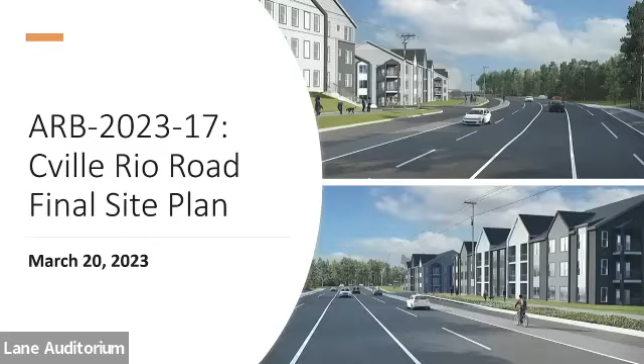The application you're reviewing today is a proposal to construct 250 multifamily units in apartment buildings in addition to associated site improvements. This review represents the second review of the site plan and the first review of architecture. The site is located along Rio Road West, approximately 530 feet west of the intersection of Woodburn Road and Rio Road West.

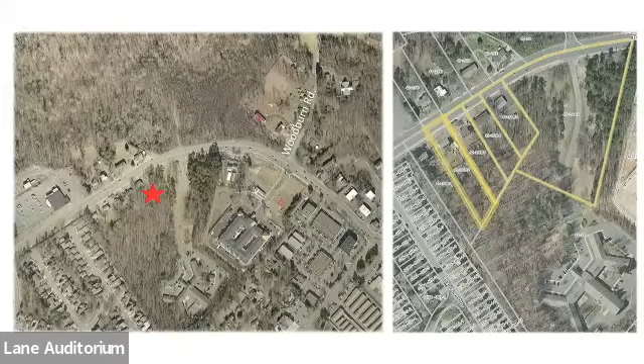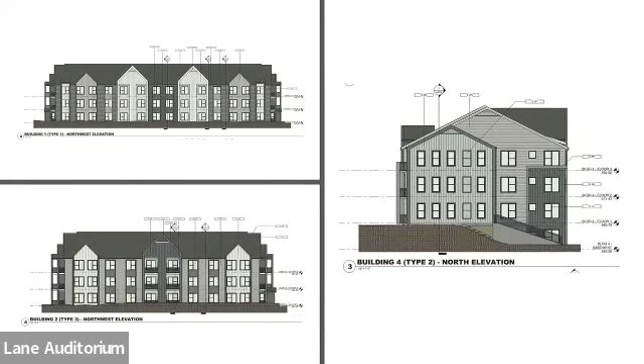Architectural designs have been provided with this submittal. The overall design of the building types within this development are contemporary in style, but feature forms and building materials that reflect those used historically within the county. The elevations visible from the entrance corridor use changes in roof form, materials, and colors to help break down the mass of the buildings. However, on the sides of buildings 1 through 4 and 6 are structures that are either utilitarian in appearance or treatments that are not appropriate for the entrance corridor facing elevations.

Notably, the structures that are to house utilities and equipment have false windows. Revising these elevations to relocate or revise the design of the equipment and utility structures, and removing the bay of false windows, would be appropriate.

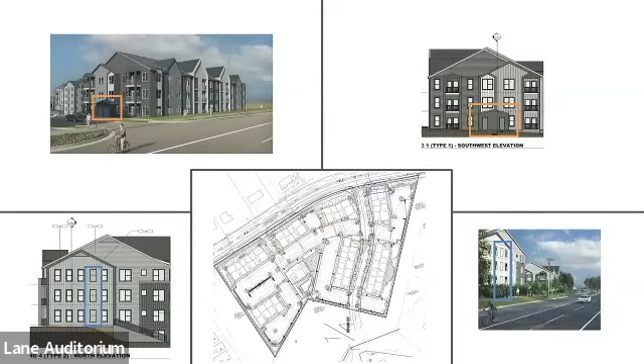A landscape plan has also been provided with the submittal. The plan appears to show large shade trees with ornamental trees interspersed, but the species have not been keyed on the plan. The spacing of large shade trees exceeds 35 feet in a few locations, and of the trees shown in the schedule, none of the caliper sizes meet the frontage requirement. The site plan will need to be revised to key the proposed species on the plan and shade trees at 3.5-inch caliper.

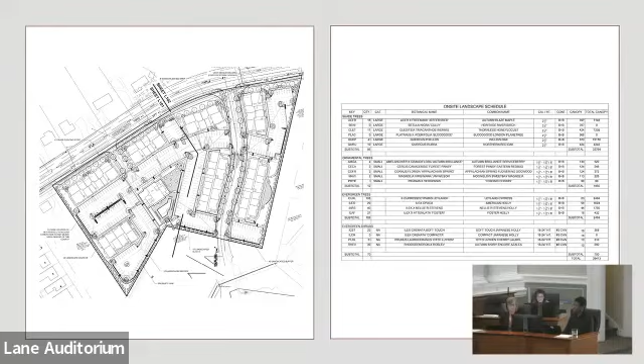Regarding landscape in the interior and perimeters of the site, due to the layout of the site, the interior parking area trees double as pedestrian way trees. 38 interior parking trees have been provided. However, many are likely spaced too close together for healthy tree growth. They are not evenly distributed and they do not meet the required caliper size. Along the perimeters of the site, it appears that shrubs instead of large trees are shown. Staff recommends that the landscape plan be revised to show interior and perimeter trees at 2.5-inch caliper and a more even distribution of interior trees throughout the site.

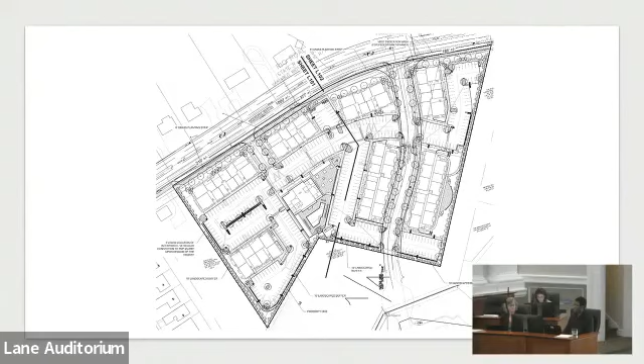Staff recommends approval of the final site plan with the revisions listed in the staff report. I'd be happy to answer any questions. All right, thanks a lot, Chris.

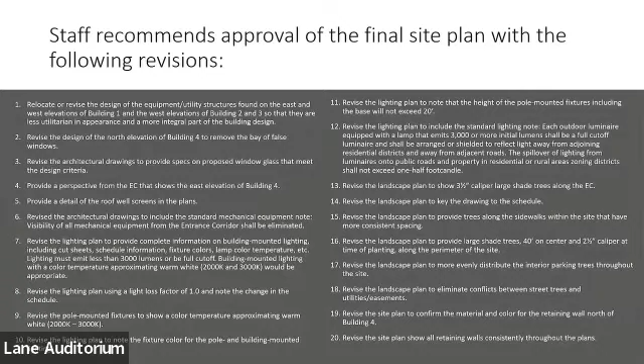Frank, do you have any questions for staff? I don't. Thanks, Chris. Dave, do you have any? I don't either. Thank you, Chris. All right, thanks. I don't have any questions either. Is the applicant ready with a presentation?

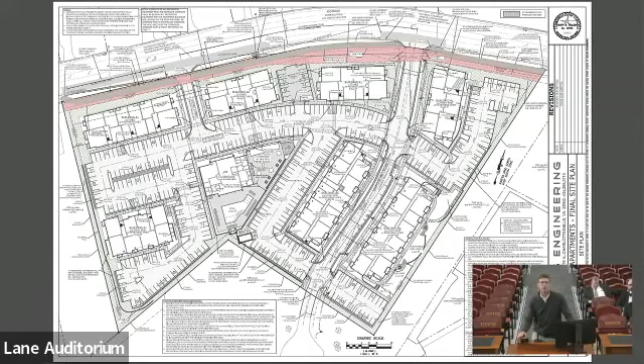And at this point, I'll turn it over to the architecture team, and they can talk a little more about the buildings and about some of the comments as they relate to the project.

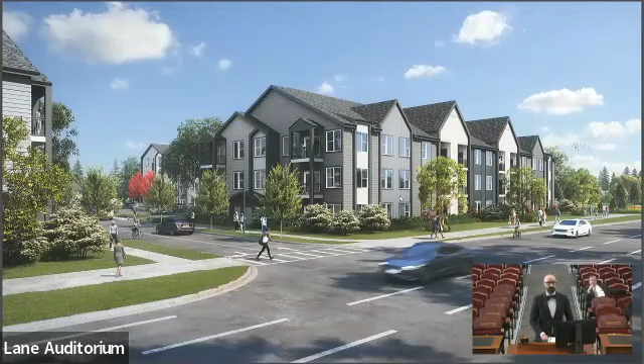Working with a lot of vernacular elements, alternating horizontal lap and vertical board and batten siding, these sort of classic 6-and-12, 12-and-12 pitched roofs, a few shed dormers here and there. We're not so modern or contemporary where we start moving into flat roofs. We're still keeping the classic materials and palette of shingle, lap, sashed windows. I don't think there's anything particularly alien or foreign in this vocabulary.

Really letting the buildings both frame the street externally along Rio, but give a sense of definition to the community itself. I think there's a good deal of variety within the palette that allows each of the buildings to begin to express themselves, which on a base, most functional level, really aids with wayfinding around the site. We like to think of our 250 residents being able to identify where they are within the site, but also on a broader scale we hope to avoid complete uniformity.

Avoiding 7 of the exact same building with the exact same paints and finishes, but without getting so staccato and random that the site no longer makes sense as a whole. So I think we've worked to balance that, both building to building and using that to break up some of the longer elevations.

As we work our way around the site, you'll see that we start to step up in building height as grade begins to step down from Rio Road. And giving a sense of what comes next, that there's a good deal of depth and activity within this community, and that you should come in and explore, giving a real sense of place on the inward facing elevations, just as much as there's a sense of definition on the outward facing elevations.

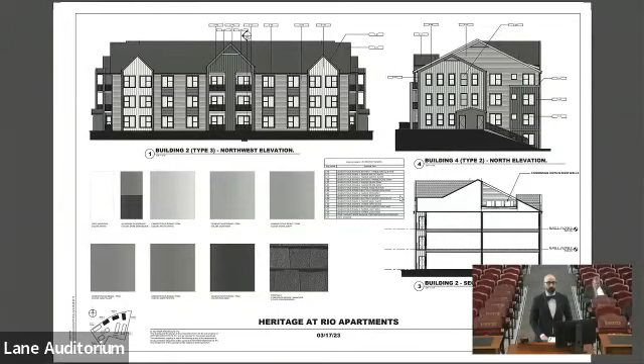So this was the material board as we submitted. I believe that the physical samples might give a better illustration of the kind of contrast that we're looking at. I think that we're taking great steps to avoid delivering a completely monochromatic building. There is good contrast and variety in what we're proposing, and that's not just coming from color. I think texture is a great tool in our toolkit.

Whether that's alternating exposures between 4 and 8 inch lap siding, working with solid panel, working with vertical board and batten, or these sort of built out frames that, even within one plane without making the building too busy, can give a sense of shadow, definition, and subtle articulation on all 4 sides of the structures.

So I think that's the end of our elevations, unless you'd like to work through building by building. I guess we could do a building by building if we get to that in questions or discussions. But thanks for that overview.

We'll go into questions now. Dave, do you have any questions for the applicant? Sure. Thank you, Chris, and thank you for your presentation. Appreciate the attention that you all have given to breaking down the scale, especially on the corridor facing elevations.

I guess one question I had, looking at it, for me it breaks down a little bit at the end where the gable expresses the entire width of the building. Is there any thought or strategy you've given to how that might be mitigated in the architecture?

Yes, maybe it would be more helpful if I went back to the perspectives. I think there certainly is a difference in elevation, we're experiencing the building on the screen right now, the way we wouldn't necessarily experience it at eye level. In perspective vision, it may not feel quite so heavy as it is now. But honestly, I left the buildings as presented with the idea that ultimately the roof is the sort of ultimate binding feature of this kit of parts. One of my fears is that if we break it down too small, we start to get this almost frenetic, overly busy and out of character assemblage of parts. So we've used the roof as a unifying tool. But I get what you're saying, in the side elevations at that rather broad 6 and 12, it can seem somewhat wide and flat. Yeah, it may be good just to go back to the perspective.

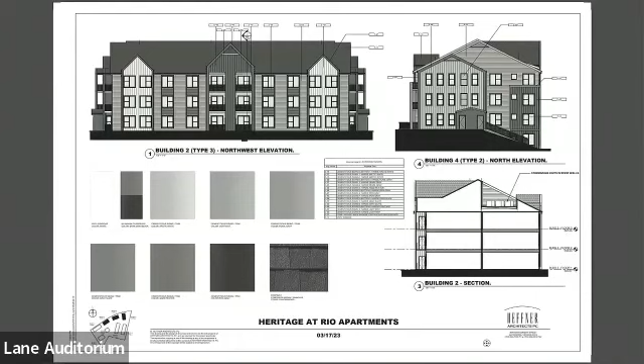So what happens is, between the roof well itself and the guardrail height we're building into the pitch of the 6 and 12 roof, at no point from grade are you ever going to see a condenser unit. Essentially we call them bathtubs - it's a large opening within the gable, and within it we'll have a TPO roof. We've selected a dark siding, so it's not a high contrast white within this black asphalt roof. So that's the thought process: that it would be delicately screened within the roof structure itself, so it just recedes into the background.

Thank you. I don't have any more questions.

So my questions just relate to two of the comments that were in the staff report. I guess the first one would be the false windows. Could you talk a little more about what the specific treatment is at those false windows?

I think right now, as we're seeing in view number 4 on this page, the thought was - and this is the tension of marrying the needs of the interior with the balance of the exterior - rather than having kind of a missing tooth within that gang of windows, the thought is we would get essentially a solid panel in the same color as the field that surrounds it and trim it out as any other window. There certainly could be other solutions to this conundrum, but that was our first thought, in order to maximize interior glazing and avoid conflicts that come with having a true blind window, which poses waterproofing issues for us. This framed panel within siding was our initial response to balancing the elevations while respecting where we have interior walls behind.

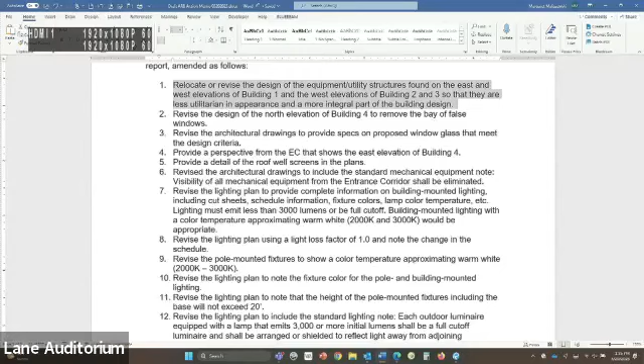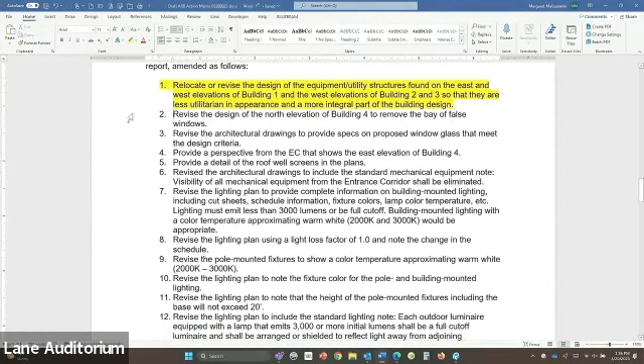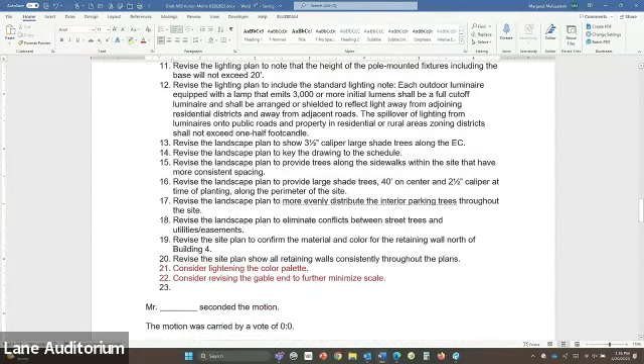So the recommendation is for approval with the conditions listed in the staff report. It looks like you all may want to discuss number 1 and number 2. And based on your comments, I added 2 items at the end: consider lightening the color palette, and consider revising the gable end to further minimize scale.

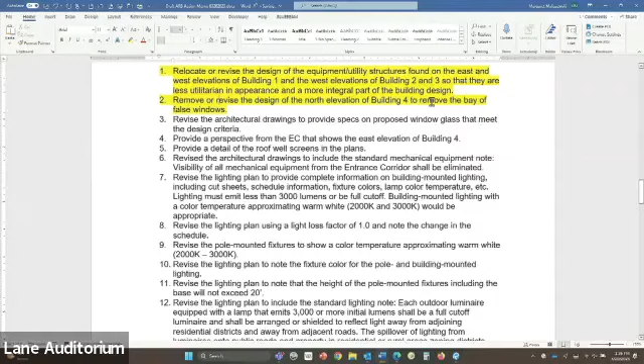Guess my feeling is that condition number 1 is okay because it's relocate or revise in some way. And I guess reword the second condition to be similar. Maybe remove or revise the bay of false windows. Oh, sorry, maybe revise the design of the north elevation of building four to remove or revise.

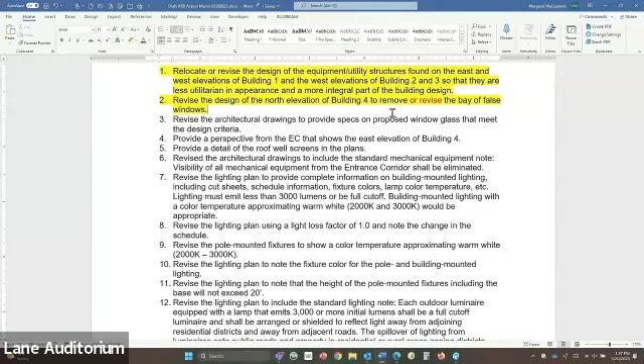I guess, Chris, to that point, do we want there to be no false windows in any case? Yes, in my own experience, I've run into that situation where you have a rhythm that you're setting up and that doesn't necessarily marry well with the internal layout. So you want to do something, and I've done that kind of false window. In this case, I don't know that just a flat panel that's trimmed out like a window is the right answer. Just looking at that rendering, that particular treatment looked a little bit unsuccessful to me. As the applicant said, I think there are other ways to skin that cat. So maybe another look at that particular situation.

Okay, another solution, but I don't think just taking them off is right. I was just thinking, do we want them to find a solution that's got real windows if possible? I guess that would be a good option. Yeah, short of completely revising the layout of the apartment -- I didn't look too closely at the floor plans, but sometimes that's just not practical.

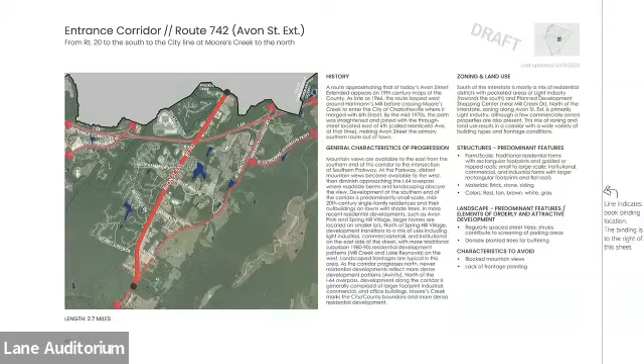Route 742 is locally known as Avon Street Extended. It runs between Route 20 South and the city line at Moore's Creek.

Overall, this corridor is characterized by distant mountain views to the east and west as you travel north along the roadway. Area zoning is primarily a mix of residential districts with pockets of light industry toward the south.

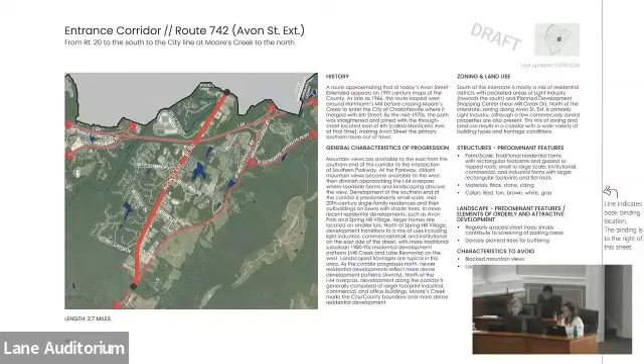There's also a PDSC, planned development shopping center, near Mill Creek Drive. And this is the precedent image for the corridor.

The top row focuses on frontage conditions, the next set of images on the distant views available, and then building forms and examples at the end.

This corridor was not broken up into segments, so we just have the corridor sheet containing all of the information. It's a relatively short corridor at 2.7 miles.

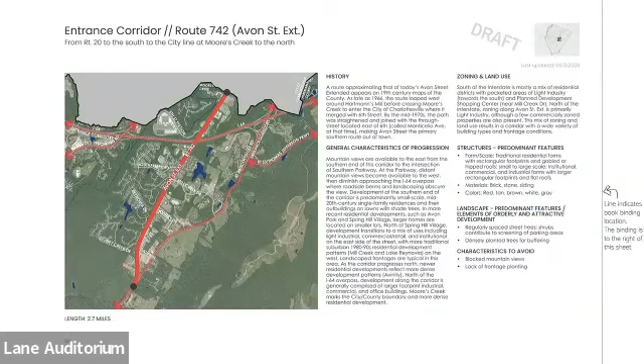I can flip between slides as needed. Well, I guess we'll just go through one round of questions and comments and then pick up discussion from there. Frank, do you have any questions or comments?

Just a comment or two. Well done, looks good.

The Avinity townhomes that front this road are super interesting. You have a good image of those, just in this context with a lot of the single-family detached residential backing up on the other side.

But then I think right next to this is the elementary school, is that right? Right there. I feel like we'll probably see applications that look like that in the future, and knowing that we have that example is helpful to think through.

And it is nice how you're pretty elevated up by the Food Lion Shopping Center and stuff, with some really distant views west, and as you mentioned, some views east.

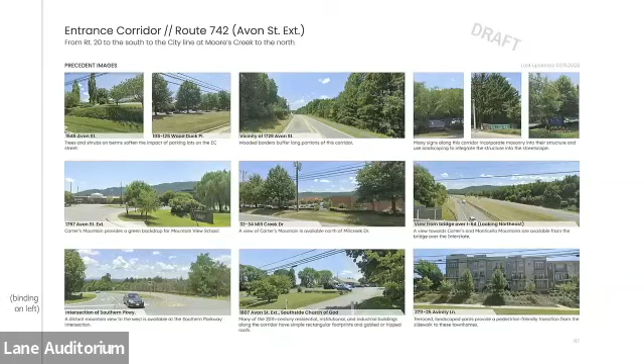Then this, I think, didn't we review - I'm trying to remember. We've reviewed a couple applications like down near the Wegmans back entrance. Caliber Collision, yeah, or maybe one that wasn't built.

Thanks, Dave. Do you have any questions or comments? No other comments, but thank you, Mariah, for the continued great work.

All right, thanks. And I guess my only comment - it seems appropriate to me to just have this as one segment, given the shortness of the corridor, picking up on what Frank said.

I think the Avinity picture is great, because I think in the future there's going to be more of that.

Not just on this corridor, but on a lot of the entrance corridors. So that's a good example of what a future applicant could look to.